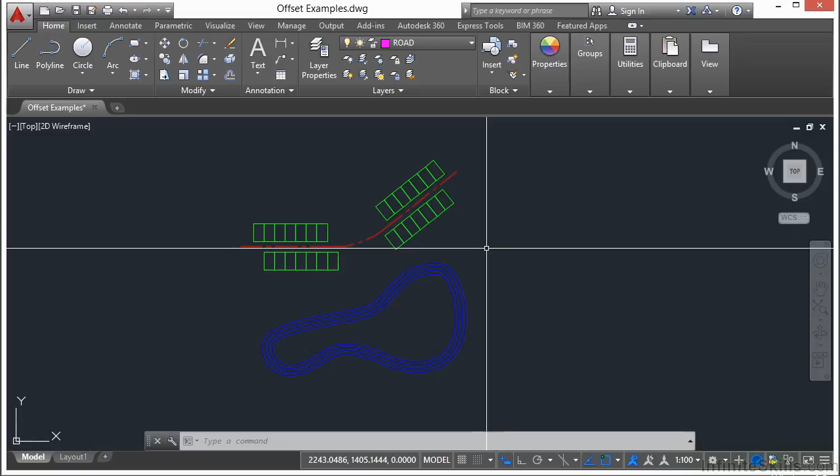Now we can use the offset command to add new contour lines to this pond. First we start by starting the offset command. Type in the word offset or type in the letter O for offset. Or you can go up to the Home tab on the ribbon, go to the Modify panel, and then go to the offset command. Either way, it starts off the same way.

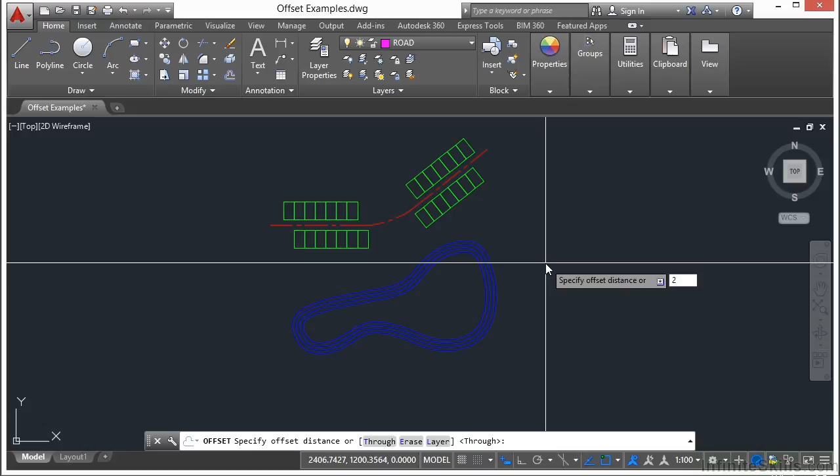First of all, you want to type in a distance. In this case, I'm going to type in 20. Press return. Now let's select the object to offset. I'm going to zoom in, pan around, and select this line right here. Now after you select the line, it starts right into the offset command. So you can see a little preview of where that new line is going to go.

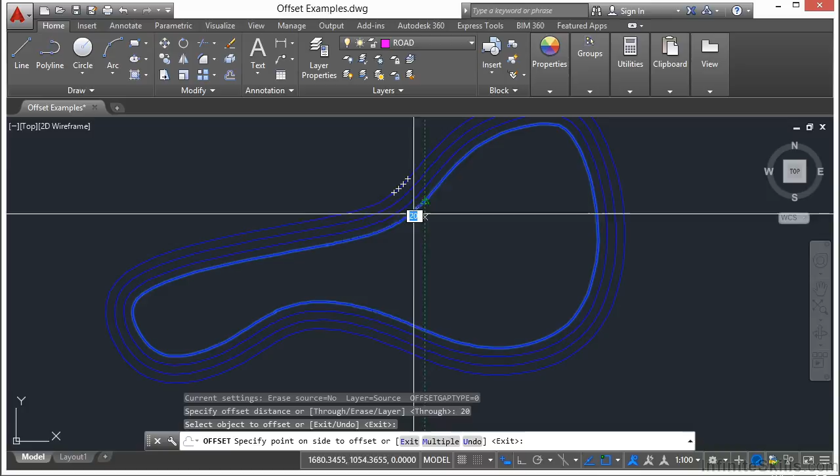And I'm going to offset this line that I've selected by 20 units, either on the inside or on the outside of the line. Let me zoom in here a little bit closer. You can even see as I move my crosshairs around that I get that little dimension there that AutoCAD is reminding me that, hey, you're offsetting this 20 units. And you get that little preview.

Where the new line is going to be created relative to the original line is determined by where you position your mouse according to that original line. So whichever side of the line you put it on, that's where it's going to go. So once you have your cursor in position, left click. And you have created a new line offset at 20 units.

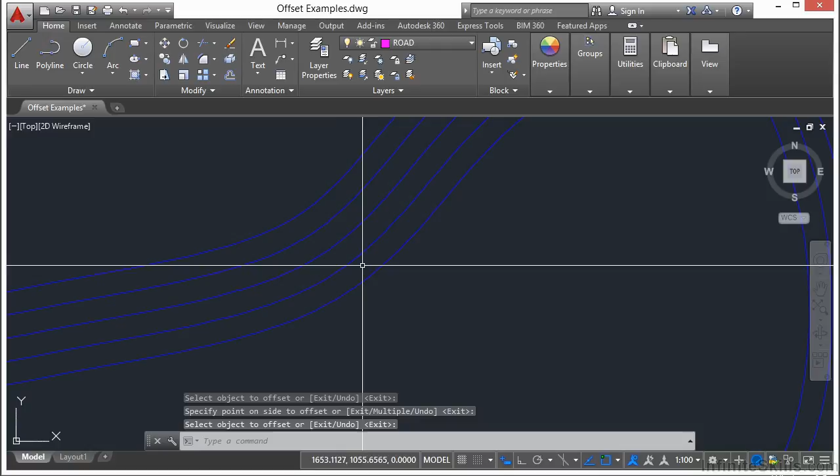So if I measure an exact perpendicular distance from here to here, I am going to have two perfectly offset parallel lines that are 20 units apart all the way around. And it's actually that simple. So maybe you don't want to offset by a specific distance, but want the new line to pass through a specific point. So let's say you don't know what that distance is.

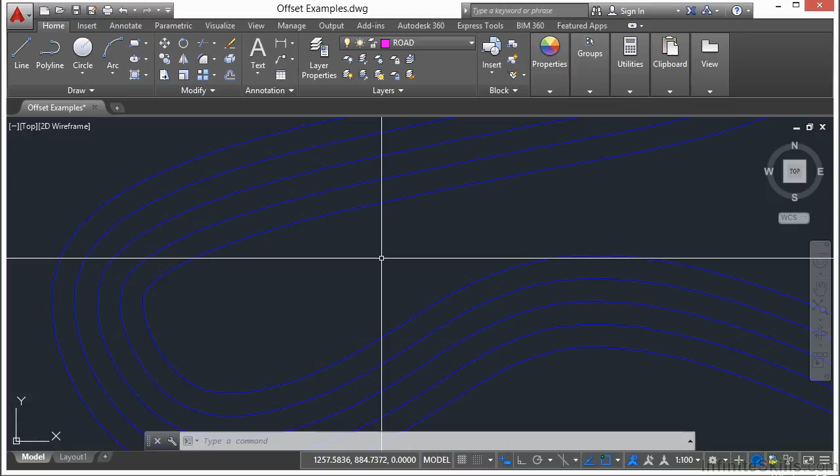You can do a couple of things. You can measure it, you can do the math, or you can guess, and then you can type in the distance. Well, the offset command has an option. So for example, let's scroll up to this little roadway. We have the center line, we have the lot lines. Let's say we want to put a new right-of-way line that parallels the center line, but matches up with the front of these lots. I don't know what that distance is.

So I'm going to start the offset command, press return, and you can see here that I have different options. Now these three options allow me to do different things. One is the layer. This way I can offset my new object and put it on a specific layer, which is actually a very nice thing because a lot of times I don't want it to go to the same layer. It's kind of like doing a copy command. You can see here when we did our contour line, it copied that old one. It left it on the same layer.

So I'm going to change the layer, type in L. I can say current or source. The source is the default setting for your offset command, and it just means it's going to match the object that you're offsetting. I'm going to switch it to current because currently I'm on the roadway layer. Okay, so now when I create this, it won't be this red center line. It'll be a magenta colored line.

And I can also pick an erase option. If I pick the erase option, which in this case I don't want to do, it will erase the original line and only create the new one. But now I want to offset through. So I type in T for through. I select my object to offset, which is my center line.

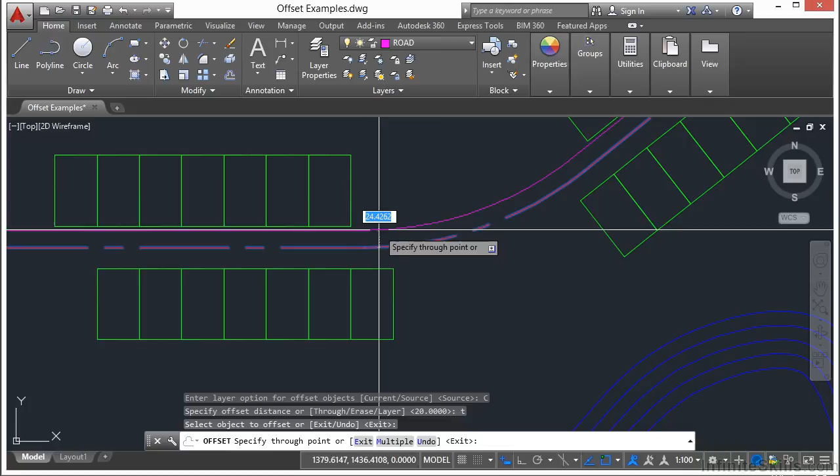And remember before I had to type in a distance? Well, you can see here now, I can still type in that distance. So I can kind of eyeball it and say, yeah, that looks about right, 80 feet or something. Or in this case, it looks like it's going to be more like 30. But that's not what I want to do. I just want to snap right to this point. I'm going to zoom in here. I'm going to snap to this endpoint, and there it is.

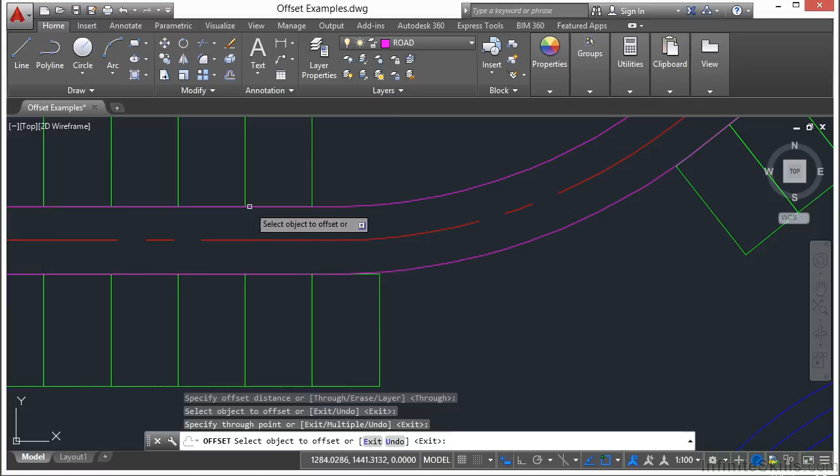So I offset this center line 30 units because I just used the through option and I put it to the current layer. Now if I offset again, if I just press enter, it'll default back to that through. Select this line, pick my other object, and there we go. Now I have my little roadway.

So you can see the offset command is very useful, very quick, very easy to do. It can help you to create a lot of different things, especially if they're long parallel objects. You can offset a line, a polyline, polygon, an arc, or a circle. You can do all of those sorts of things.